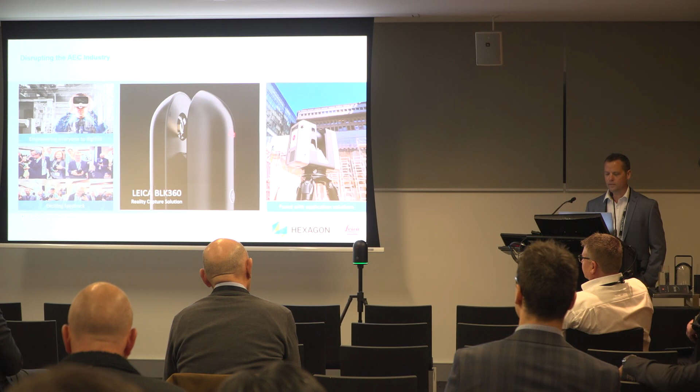We also have the full suite of reality capture products, so that's including drones, mobile mapping. But probably what's more interesting is the products that we've really developed for the AEC market, such as the BLK360, which, from a simplicity point of view and a price point of view, has really brought scanning to a much broader audience than previously would have had it. More recently, we brought out the RTC360, which again brings simplicity and speed to the AEC market. We've developed some new products in 2019. I'll just show a video of one of them.

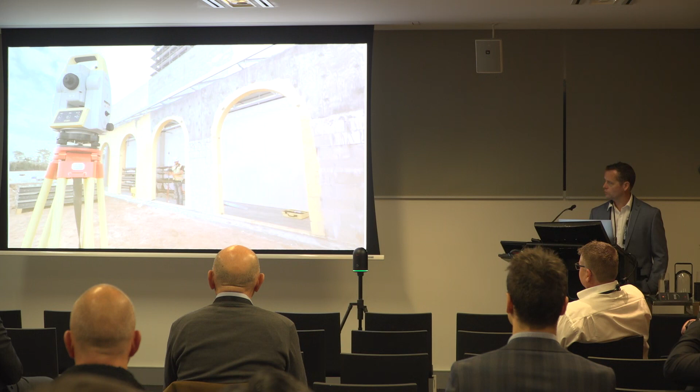Achieving success in today's complex world of construction demands smarter, faster, and less error-prone tools than plumb bobs and tape measures. Being able to take the design to the field with high accuracy at a pace that can overcome unforgiving timelines and last-minute changes has become the benchmark. Requiring only one person to operate, the Leica iCON iCT30 construction layout tool makes layout tasks extremely efficient, freeing up valuable crew members to perform other tasks. Construction environments are often busy and challenging, causing the prism to lose line of sight. In this situation, having a layout tool that is smart enough to anticipate your movement and reacquire lock prevents you from having to slow down. While having a smart layout tool that keeps you moving forward without losing a step is important, it is only part of the story.

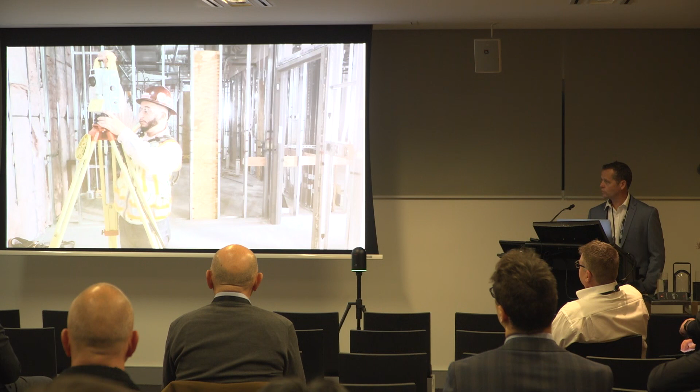Being easy to set up and operate is the other. The intuitive touchscreen interface of the ICT30's field controller allows you to easily interact with the design layout, helping you move from point to point with confidence. This encourages team members of all skill levels.

The 3D model in the field provides a visual point of reference that helps you understand complex layouts at a glance. And with reflectorless operation, the ICT30 can go anywhere you can, eliminating the need for awkward workarounds, tools like ladders, or help from others, keeping you moving from point to point.

The ultimate versatility, invaluable quality, and the comforting dependability of the ICT30 by Leica Geosystems enables every team member to deliver with confidence. Rethink what's possible.

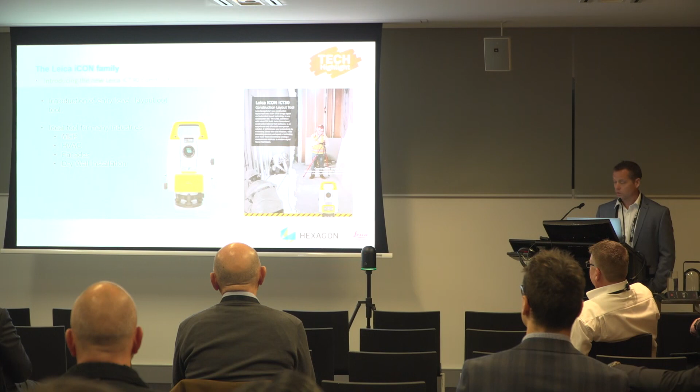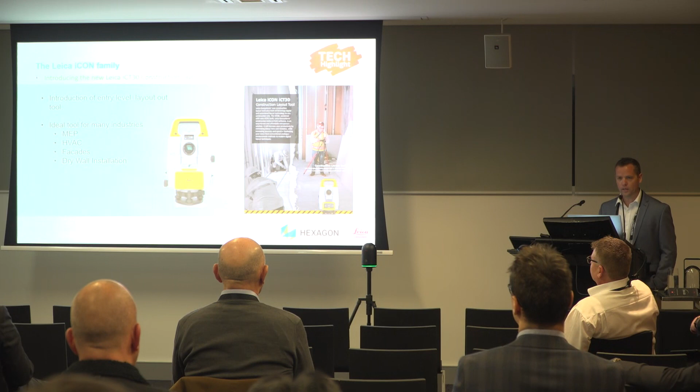So we've had the high-end robots for quite a long period of time, but we didn't have the construction point layout tool, and that's why we've brought that out. It's more an entry-level instrument, really focused on the internal trades, for your MEP, where you don't need such long range.

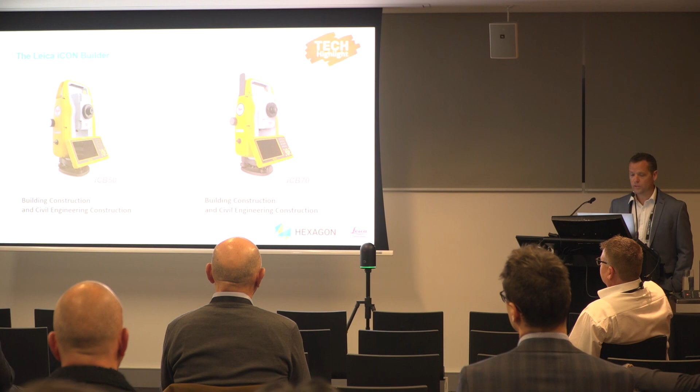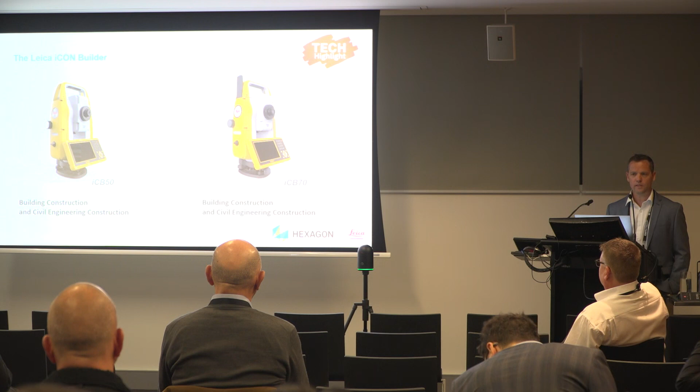We've additionally brought out some manual total stations as well. We've had the builder for quite a number of years, and we've brought out a new generation builder which runs the Icon software on board. So we've got the ICB 50 and the ICB 70, with the difference being the ICB 70 also has a built-in modem, so you can download and upload information from the cloud, whether it's BIM 360 or ConX, which is the Leica cloud software.

One of the novel or unique parts of our offering, if we look from the manual total stations to our point layout tool to our full robotic total stations, and the same with our GPS receivers, from the simple network rover all the way up to the 70T, which is our tilt adjusted pole - the one thing that brings it all together is the Icon software. It's one software across the entire hardware suite.

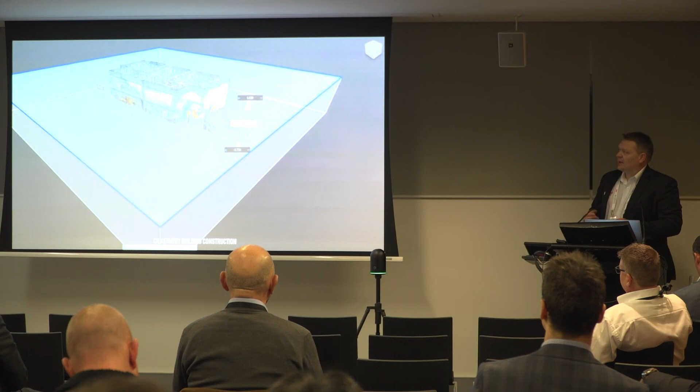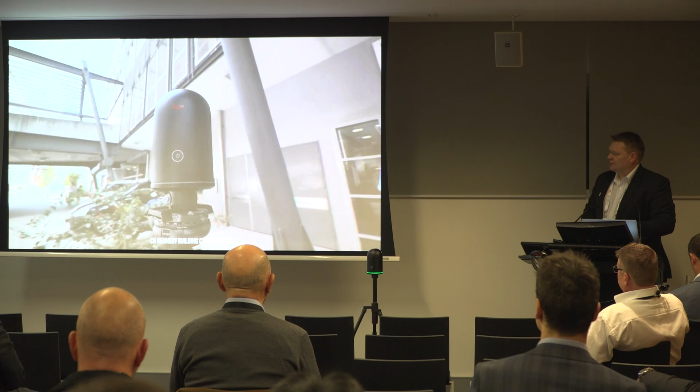Certainly we come out of an industry or experience through survey and high-end optics, but managed to combine that with some newer technologies, certainly new offerings from Leica, some other offerings that we look at through the industry and what's available to bring to market, specifically for building construction.

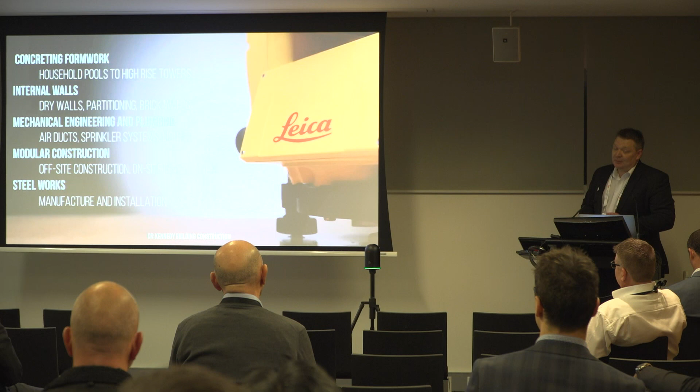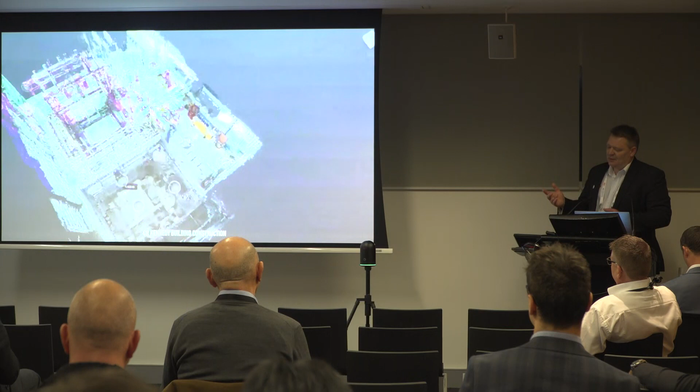So working with some local partners there who are in prefabrication, a very growing and important part of the sector. MEP, extremely important - that's why we've been involved with the BIM, MEP and AMCA for as long as we have. Steel detailing and steel fabrication through our connectivity directly to Tekla, so the IFC out of this system goes straight into Tekla and vice versa.

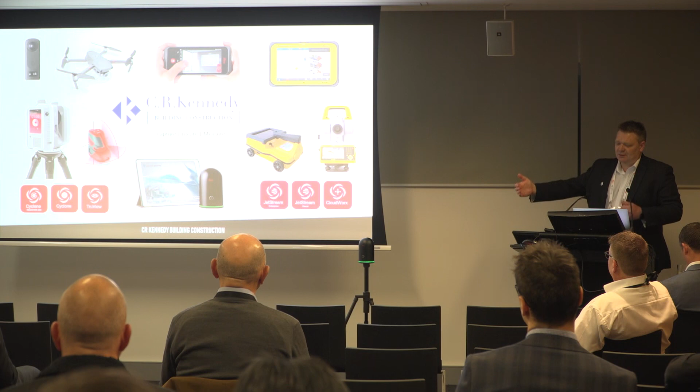So yeah, a good covering. Thank you again for the introduction. The C3 scanner, I think, is now in that very much disruptive market or segment which we've experienced with the BLK, and the C3 scanner will allow other people to take on that very important job of detection who don't necessarily have that sort of engineering scientific background, which is quite amazing. Likewise with just the prevalence of drones, we have the capability to support those as well through Pix4D and other solutions that we've got.

But today we're talking about the BIM workflow and certainly the improvements that have happened from version 5 and now, as of last night or the night before, version 5.1.

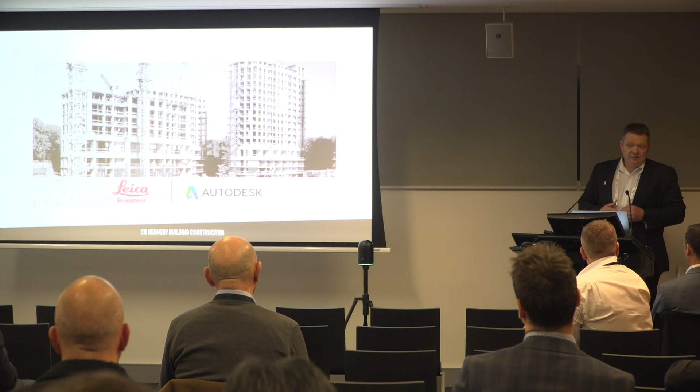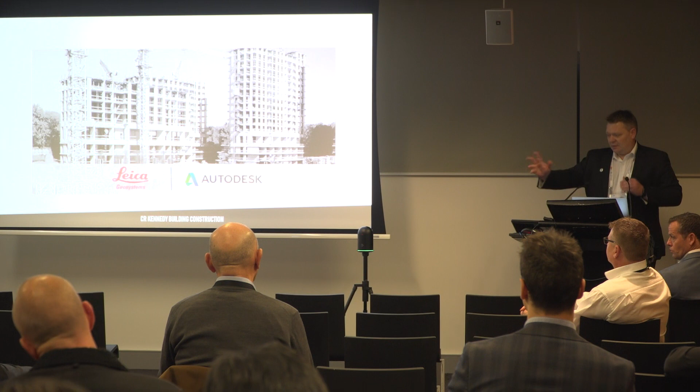Probably 4 years ago, one of the reasons I moved to CR Kennedy was that Leica and Autodesk announced an alignment, or partnership perhaps, to jointly develop products and workflows. This is probably the first iteration of this. I'm sure things were happening in the background before, but the first thing the market saw was the BLK, an amazing device, because on their own Leica probably wouldn't have come up with this.

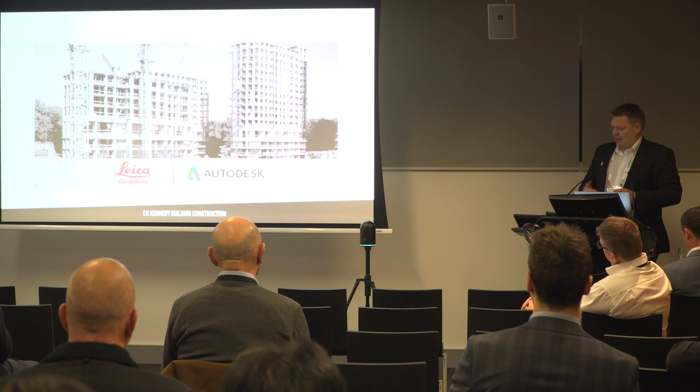They worked with engineers from Autodesk and looked at the workflows and how people want to use scanners. This was the first scanner ever on the market to connect through to the iPad, giving that connectivity, ease of use, and simple control.

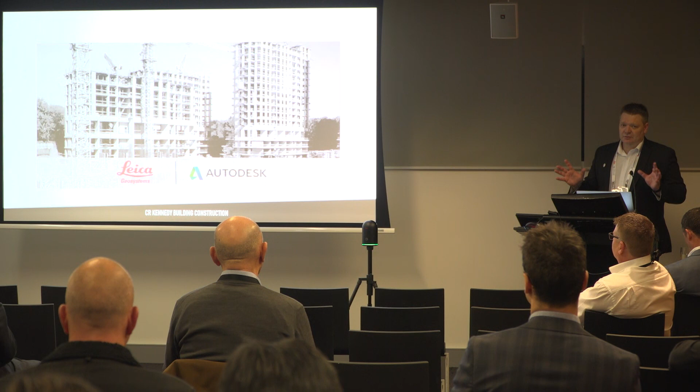Continuing that, the updates to the Build 5, which is basically the term I'll use for anything to do with building layout and setout measurement, also has that partnership between Autodesk and Leica. I don't think you'll find that anywhere near as strong for any other vendor in the market. So this, in a nutshell, explains what happens.

Up until now, surveyors in the room would be used to the idea of doing a stakeout or feature survey, bringing those discrete points into a fairly basic program. I'm sure it's very clever, but it looks pretty basic. Extracting those into contours and features, then passing it back to the architect who's fairly unimpressed. But anyway, that's how it worked.

Now this workflow is a full BIM workflow. We can start picking up in 3D, doing feature surveys, and more importantly take models and scans from both the RTC and the BLK, put that into a single environment, and ensure it works - clash detection, or clash avoidance is probably the better word, because ideally you don't want to detect it, you want to avoid it as we design.

And the fact that now the Build 5 works with the BIM 360 platform, and also through the acquisition of APL, the Autodesk Point Layout system - it's a system of 3 plugins for 3 different programs: AutoCAD, Revit, and Navisworks. You can certainly do this whole round trip very easily, and work also with the cloud system that comes with the BIM 360 Layout device.

So people have been looking at that, Hanson Young and a few others. Very good, we think, from a project management point of view, maybe a site supervisor. But our workflow through the iCON build is certainly more finite when it comes to actual building setouts. Verification is probably okay with the other BIM stuff, but certainly the setouts for us is where we excel.

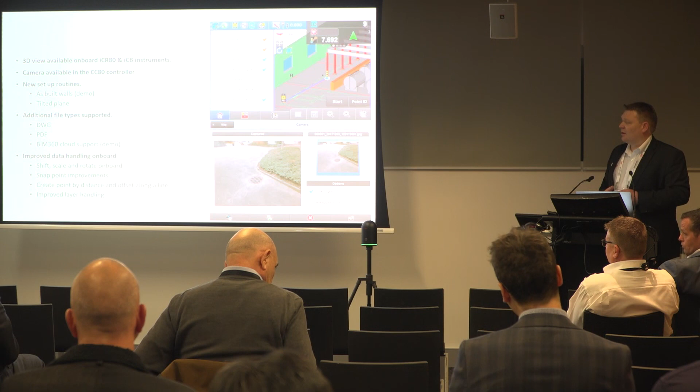So, quite simple. Now, to actually get to this point today, we decided, probably foolishly, to come in yesterday and measure up, and we were going to take it all nice and easy and do some demos. But this room is booked. So when they went to a break, luckily we had the BLK with us, so we came in and took four shots, just bang bang bang bang, and left. Not even with the iPad, nothing.

So what I wanted to show was how that worked - the fact that the BLK, stealing a little bit of Greg's thunder, now also works with our Field 360 program. For those of you who have used ReCap, that's an important partnership, but it's fairly basic. Whereas our survey grade, or survey workflow I should say, through Field 360, proved itself yesterday, just really simple.

So came in, took the shots, went back to the office - not my office, Bernie's, that's why I wasn't there - and downloaded it from the device to the iPad. So that's what I was showing there before, just connect through as normal.

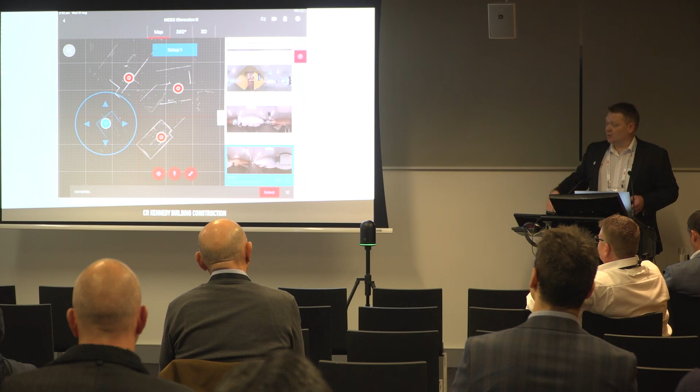All four points basically popped on the screen, remembering it doesn't have any location in this device, unlike our big brother RTC, so it just basically drops in. But you can align them using the alignment tool, so you actually get to pull these together until they find a connection. They will then not automatically, but it'll optimise and find its best fit.

And then you basically do that on the other two as you go through, and we end up with a room plan and a bit of an external, because we were mucking around by then. The other big advantage is that on the iPad you see the point cloud. And this was actually a low-res scan because I put it on the lowest setting I could to be able to get out of here in time.

And it's enough though for me to model up this room last night and give some basic information through to Chris, which you'll see in a second. And also, that's from the Revit, but I could have at this point put some tags on, put some notes, done some measurements, those sort of things, just here.

Now, there's two things. This is low resolution to begin with, and then when it gets to the scanner, when it gets to the iPad, it's already cut it down as well. So it's just very lightweight objects, they call it.

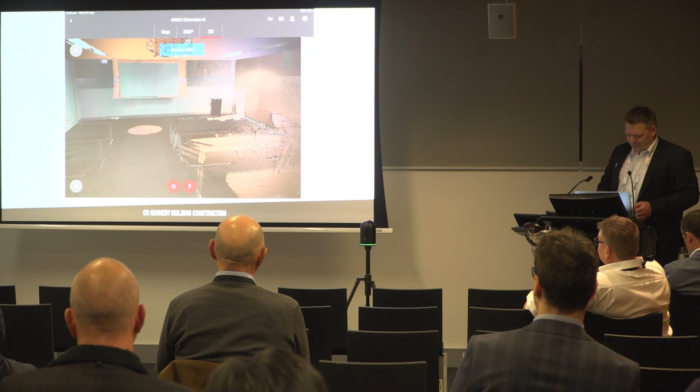But enough to understand how it's working in space, and then I pass it through into Register 360, which is actually the processing tool. From Register 360, and what I might do - it's a little bit out of sync.

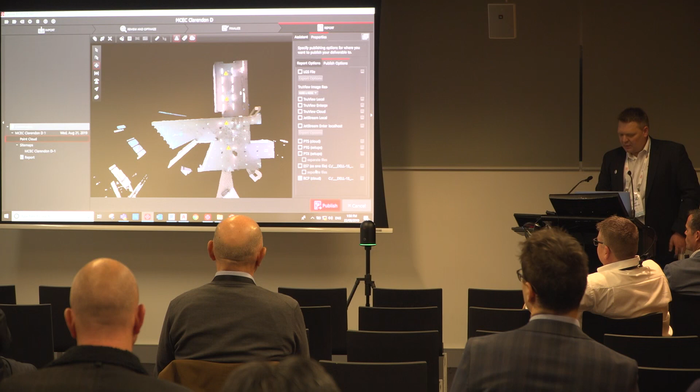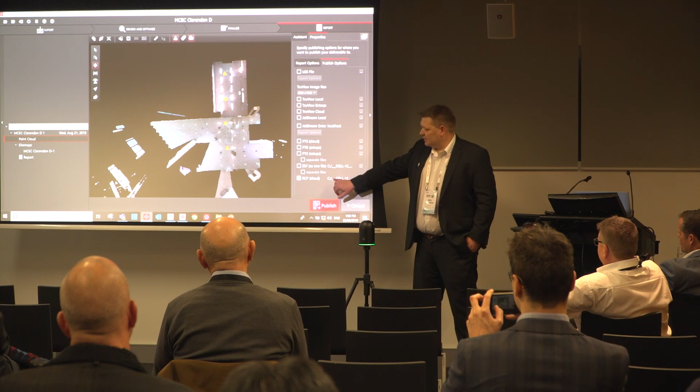From Register 360, we have the ability now of exporting directly to RCP. So this is part of our Publisher Pro add-ons. And part of Publisher Pro is the fact that we can go out to RCPs, separate E57s if you need individual setups - something like Verity or those sort of programs require that. We can go out to LGS, which is our proprietary format, which also has some connectivity to third-party products.

And then from that RCP, obviously, I'm just opening straight up in Revit. And Greg might have a little bit more to talk about some of those features as well.

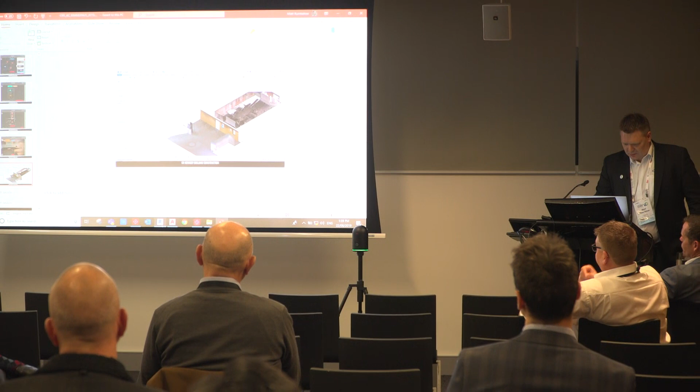Cheap and cheerful, but popped it into my Revit environment, modelled up some walls, coordinated through with the existing walls that were there. And then from there, I used the tool called Autodesk Point Layout. So I might just show that a little bit and then pass through to Chris as our demo progresses. So here we are, I've just made a quick wall set. If I turn that into a different colour, maybe you can see it a bit better.

Not really, some walls. Up here you'll see Autodesk Point Layout, which gives me an enormous range of options to basically prep this plan or this data for use on site, use in the field.

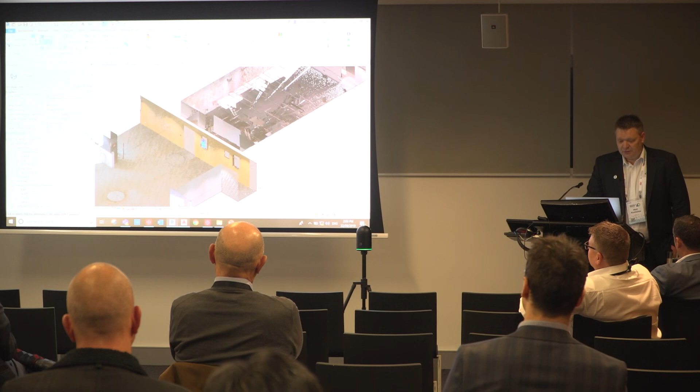Some of them are automated, so walls are automated, slab floors and rooms are automated if I use those tools, as well as ceilings.

But basically I've just populated a couple of points on this wall and we move over to the export option. Remembering this is for Autodesk Point Layout 2020, here is the new integration, which is like a field project. That basically combines your export references and your point files of the points we've set out, and allows us, if we go to file location, to actually link into BIM 360.

This is where it might get all undone because I don't know if I'm on the network still. No, I'm not. Excellent. Okay, give me a couple of seconds and I'll come back to that.

BIM 360 sits there in the options list, and it populates straight through to the various projects that I've got authorization to.

My hotspot died about two minutes before we started, but this will get me spam for the rest of my life. Maybe I deserve it. Who said that?

So back to here, we'll go back then. From this point, you've probably noticed already, this has actually been around for a couple of versions. We can also create issues that we might have from the field and read them against the model, or issues from the model we want to check on field. So this is what these BIM 360 field issues are about.

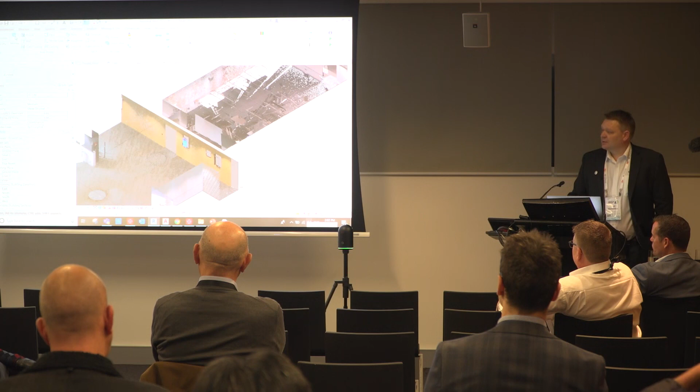What we're going to do now is basically have Chris open up his field controller. Now the field controller, it's a Panasonic ToughPad, so extremely hard wearing, but it's running Windows, so we can actually use pretty good connectivity through to things if we wanted to in the background, even having Revit or Bluebeam or something else running. But here it is, and I've emailed it across, so I've sent it up to BIM 360, I've rung Chris, woken him up, and he's on site now.

Yeah, so basically it's really simple. You go into your BIM 360, you start your activation on it, and then it really allows you to then, whatever project's been downloaded to you, to bring them in.

You just hit your reference data, you just tell it, I want to look at your BIM 360 server. It'll connect up to it. And then once you get in there, then you just go into your documents.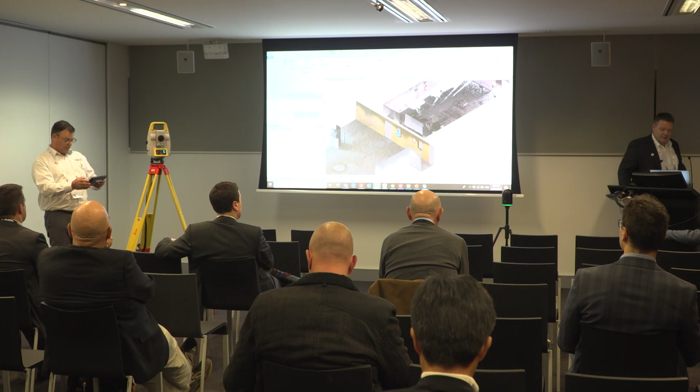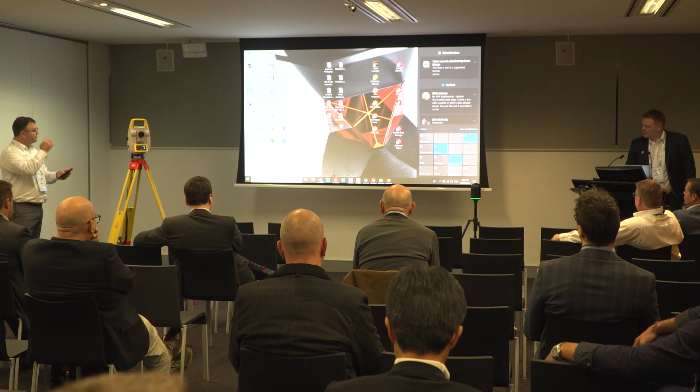Hang on Chris, projections dropped off. You got to check, just do your connect again. I'll make sure nothing's on my screen. It's still connected to you. Right, try that. It's still connected to you. Dun, dun, dun, dun. There we go. Do you want to connect again? So it's connecting. Yeah, here we go. There we go. Very simple.

And then when you go into, just pull the documents out of it. Let's hit into your BIM 360. Are you connected online? It might be grabbing it through and just doing that. Give me probably two seconds. No, I just won't, I don't need to grab it again.

So once you get your documents uploaded into it, then it's very simple. Then from there, you just want it as quick and easily as you can for a lot of people. When you show up on some sites, sometimes you don't have all the grid, the targets up on the wall with coordinates X, Y, Z's on them.

Sometimes you have grid lines that are snapped through but aren't always clearly marked with an offset. They're just labeled, A, B, C line or 1, 2, 3. That's no dramas for you really.

We created a quick little room here, and this is how easy it is to set up. We'll just shoot into these speakers, and then I'll shoot a penetration through the wall, all just by setting up off of some wall alignments right here.

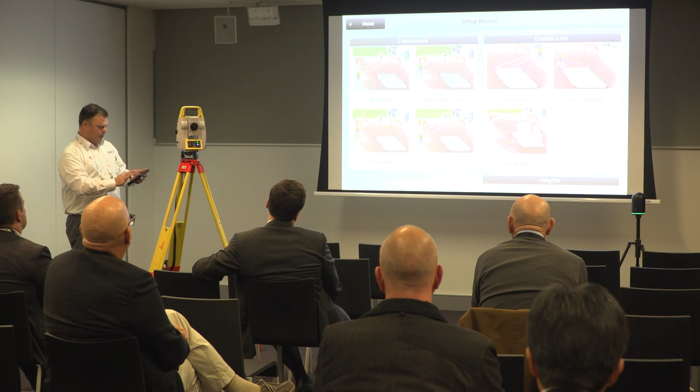So basically, you go into the home, you hit up your setup, and then you're going to hit as-built walls. Then it takes you into your instrument that it's connected to. It just makes sure that you're nice and level, and then you do your tick through.

Now basically what it asks you to do is to do your measurements and then define where your measurements are at. So basically, I'll shoot a wall here. I'll shoot a wall here.

I'll shoot the wall here, and then again here. Now this is two points on each wall? Yes, two points on each wall. If you want a really highly accurate setup, you can do two points along two grid lines. It'll do the exact same thing. Basically, it creates the intersection point, and then it tells your instrument where it's set up off of just shooting into those two baselines.

Now it's got you set up in the XY, but you don't have any Z values yet. So then you do have to set your Z value. So then you just transfer heights from anywhere. We know that the floor here is basically the 0 elevation. So I just tell it, it's asking my reflector height, which I'm using the laser, so it'd be 0.

And then I just tell it, I can either pick on a point that's on the floor, or I can just tell it it's 0 there. And then I hit start to start my EDM to measure. And then once it's green, I hit store. It's stored on my end. Okay, so now that you're finished, you basically can either start laying out or capturing data, because you're in a,

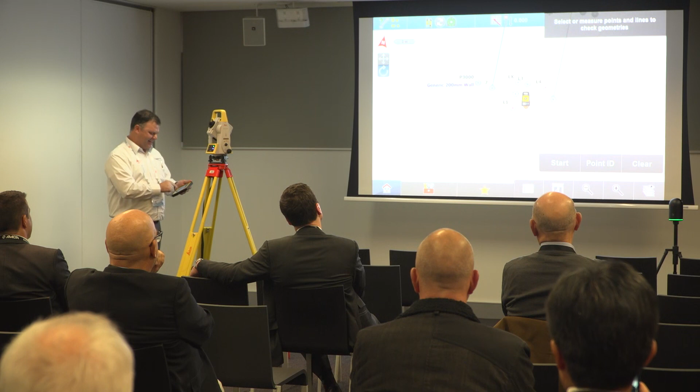No, it won't. You got to shift it. Yes, sorry about that. That's version 6 where it does it automatically. Hold on. I apologize. I will have to do this one more time.

Just keep going, and we'll try and connect up once you set up. So we're wirelessly casting from the little device to the laptop, and it's just jacking with my tablet right at the moment, which is really funny, because it wasn't earlier. You might have to cancel me out. I can't see all my screen. I can't see it either. Okay. This is beautiful. All right, we'll just finish your setup, and then I'll see if we can. Hold on, I'll have to do my setup really quick over again. It's locked me out of half my screen. Okay, here we go. I apologize for this. It worked like a charm the first two times.

Oh, that's good. Basically there, you can see where it says, please point the telescope to the desired work surface and press start. So with a pipe, you don't have to create an alignment further than the surface that you're staking to. A lot of times when you want to stake out to the walls, you have to create offsets on each side of the wall to be able to stake to this wall. In iCON, you don't. You just have to have an alignment.

It could be an existing pipe that you have as-built, and you want to see where it's going to penetrate through the wall. Then basically, if you've modeled it, you select it, you hit start, which starts the EDM. It'll measure. And then you can see where the dotted line will, if it starts catching up, it'll locate. Yeah, it's even still lagging. But that line was the projection of that pipe, even though you only had a small piece of it.

Yeah. And so basically, you can store it, and then if you wanted to project where that line was at over on this other wall, basically you point to whatever surface it was going to be at, and it will find where it locates it on the other side of the wall.

So say you have a pipe run that runs the length of your room, and it's starting on one side, you want to see how it impacts every column in your room. If it goes through them, then basically you can do this by shooting to each of the surfaces and marking them. Even if it's on a slope, it works with slopes, which is also really nice because not everything is flat penetration.

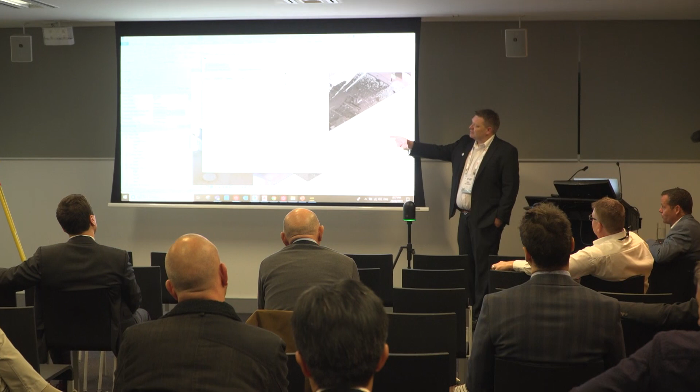So we can import that file that's just been made, or it can come from BIM 360, and it will coordinate back to those original points that you put in the model. And you can see, probably be 100% check, but if there were any differences because of on-site conditions or you didn't get to some of it, it'll show up there as almost like a job list.

Just a question with that for as-built. Is the workflow more efficient? I mean, setting it out and then capturing as-built set out versus doing a reality capture scan and comparing that against. Great question. So we've got a scan here because it was the quickest, easiest way to get the whole room and environment, and then we got out of here.

Depending on that scan workflow, I know there's a few ways of going down, whether it's say a Verity or just straight Navisworks, or we've got some solutions ourselves. Depending on how you're checking against that point cloud, you've got a lot of data when you probably only need a few points. It's one of those things where you're trading off. You've got lots of data, which is mostly correct, as opposed to this, which is not much data, always correct, because it's the most accurate way of defining a point in the room or the space.

Lots of people have gone down the scanner path, we know because we've been selling them, but it's not necessarily the best way of doing the verification for everything you're trying to do. Greg might talk to that because that's obviously his area, and you're not that blinkered that you don't realise that there's other tools. Oh, absolutely, and it's a good question. At its most basic level, some things you need to know more accurately than others, and that's where something like a robotic is fantastic. And then there's a lot of other stuff which is fantastic to capture with the scanner.

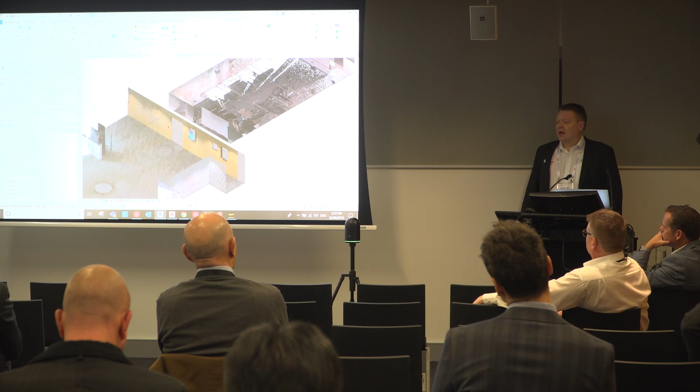So moving up to that device, which we've sold lots of, that's a bigger space to play in. Some are, but not many are, using that as their only verification tool. The difference in the verifications, though, is if you're using a total station, you come in and shoot the walls and you can find the squareness of your room, but if you scanned it, then you can see if there's any deformations in the walls, the slab or the ceiling. It captures a lot more information. So it depends on how much information you really need.

Yeah, I guess if you're setting out... No, most people don't need the actual tray itself. They just want to know the hangers and the weights, so they can figure out the holes and what's going to be supporting. In a lot of the documentation I see, the cable trays aren't even there. They're just points on the wall in the soffit. So yeah, it does depend. I'm conscious we need to get to Greg, who might further this at our stand. But it's a great question, and the software is catching up to what you guys need to do from a point cloud, because just popping a point cloud into a space is not enough.

So with that, I'll pass over to Greg, who I'm sure everybody in the room is excited about. Thank you. Thanks, Matt. As Matt said, my name's Greg Franz. I'm the Reality Capture Segment Manager for Leica Geosystems based here in Melbourne. Even in the half day we've had at this conference so far, the number of people I've spoken to that have a BLK 360 is really exciting. So that's quite impressive.

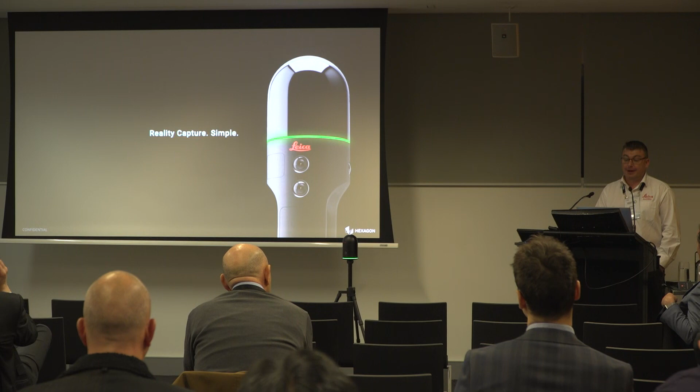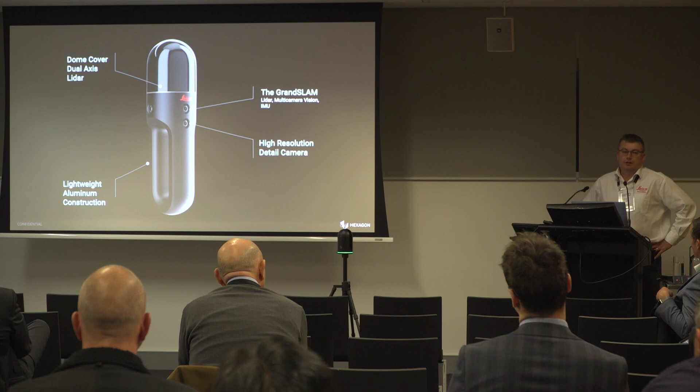So the BLK2GO, and as you can imagine, we're quite excited about it, and we're calling it Reality Capture Made Simple. There's a number of really exciting things about this. It has a camera, so it will take pictures as you go along. It's very lightweight, I think it's like 800 grams, so it's quite easy to use. It has a little dome on top, which is great because it'll get a lot of use, so it helps protect it.

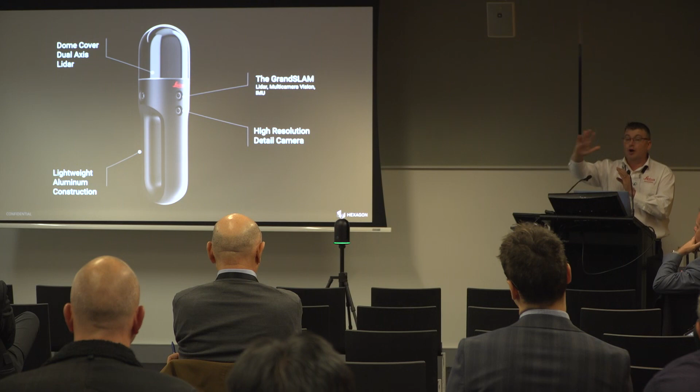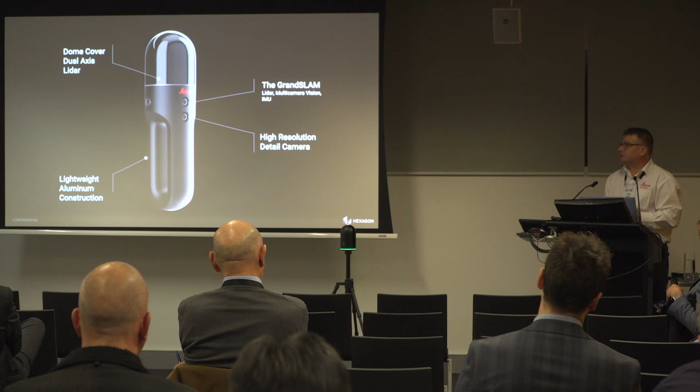But you may have noticed there were two green lines in that previous movie. It's actually a dual axis LiDAR, so it's not just one beam, it's sending out two, which obviously improves the capture rate. And one of its real differentiators is what we call the GrandSLAM. There's other devices which use SLAM, simultaneous location and mapping, which is just using the laser by itself. But we, from our RTC, have used the VIS technology, which is basically three extra cameras on the BLK2GO, and they are continually tracking you as you move around the room.

So that combination of this VIS technology and the SLAM technology makes for a much more robust solution and a lot more consistent results. And that, like I said, is one of the key differentiators. We'll have an app. You can't have anything nowadays without an app. So there will be an app which will let you see what you've captured as you're moving around. Some of the BLK360 users will be a little bit jealous of the 2GO because it does have a cable to download data. It's a little bit contentious, the cable, yeah.

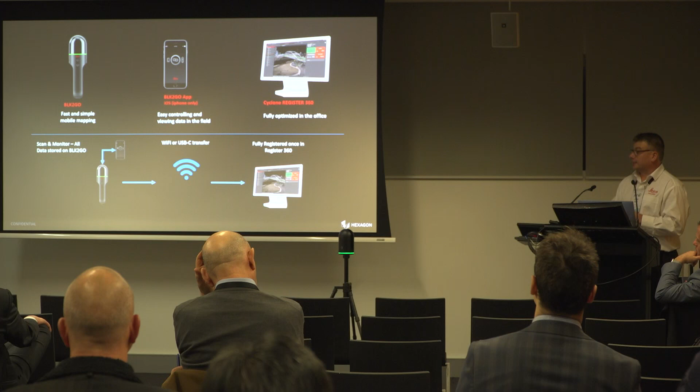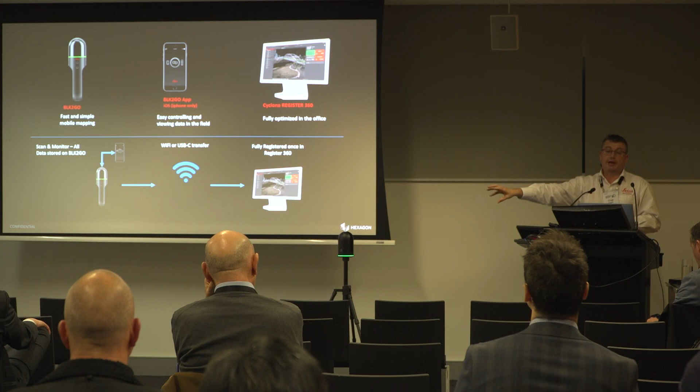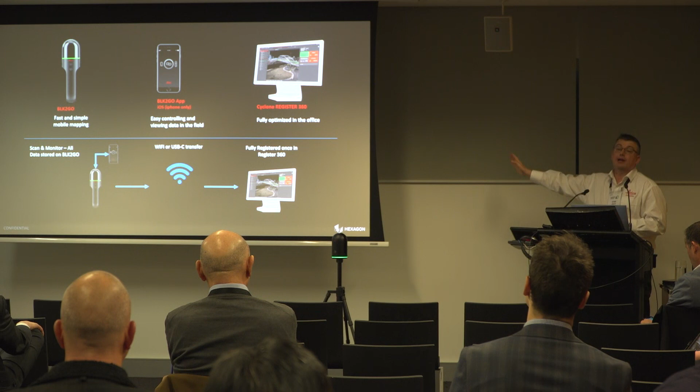We also are about to release, and this is likewise for the BLK360, a BLK edition of our Register 360 software. It's purely been designed to work with the BLK360 and the new BLK2GO, really to streamline that process. You can connect the BLK2GO to Register 360 and then export an RCP file straight from there. So it's really made that much simpler. We really think it'll be used in a lot of different ways, and like a lot of our products, they're used in ways we would not have even imagined.

So it's not too far away from coming, but in my little bag of tricks... Do you have one? We have one, but it's not working.

So this is an actual prototype, here to give you an idea of the size of it and the weight. We're expecting it to land sometime, maybe October, November, something like that, so it's not too far away. But yes, we're quite excited about it, and there's a lot of other new things coming. We talked about verification. We've got some exciting news about verification. That process, I think, is really key. We've seen verification in manufacturing for decades, and now it's starting to come into AEC, which is quite exciting. And this will probably be one of those tools which will really help that process.